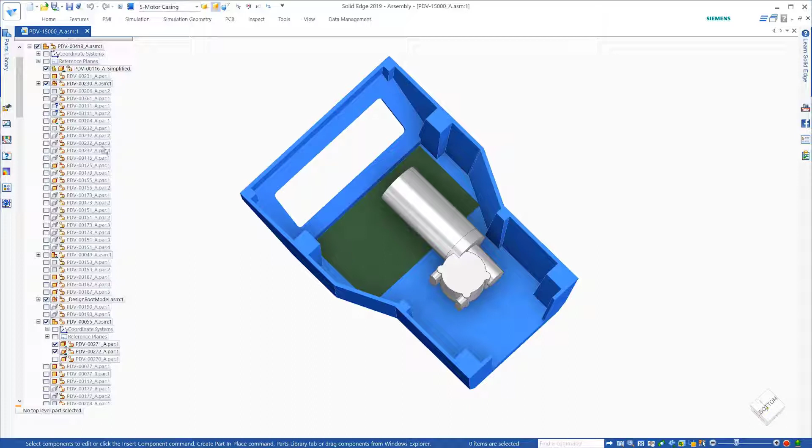Starting with structural simulation, in addition to static studies for stress, strain, buckling, vibration, and steady-state heat transfer, users now have the ability to study the impacts of heat moving through parts with relation to time, also known as transient heat transfer. This allows designers to see temperature changes over time in order to assess things like heating and cooling performance.

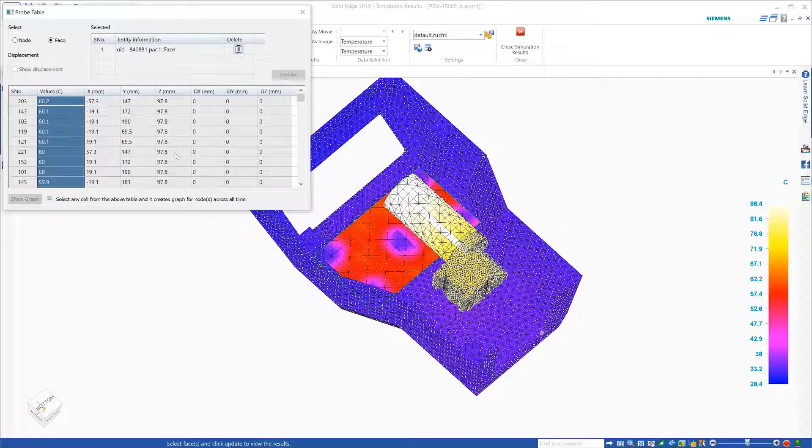In this example, we need to ensure that the heat generated from the motor doesn't overheat the printed circuit board, or PCB, located directly beneath it. A steady-state heat transfer has already been defined here, which takes into account the heat being generated by the PCB and the motor. Using the probe tool, we can query the temperature at different points on the board. Here, the new face probe option allows us to easily find the hottest regions.

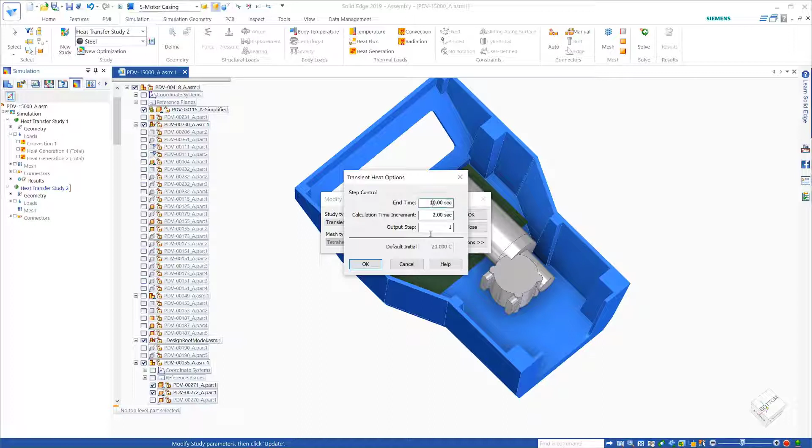What we're seeing here is the final steady-state result of heating parts until they have reached full capacity. However, for this assembly, the motor only works for a couple of minutes at a time. As such, to get a more realistic view of the heat on the PCB, we'll use transient heat transfer to accommodate for these working times. This is as easy as copying and pasting the existing study, changing the study type, and defining the working intervals. Then the study can be solved.

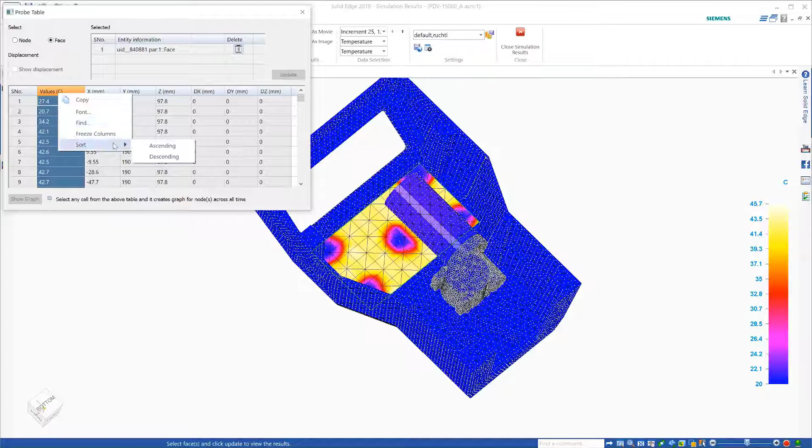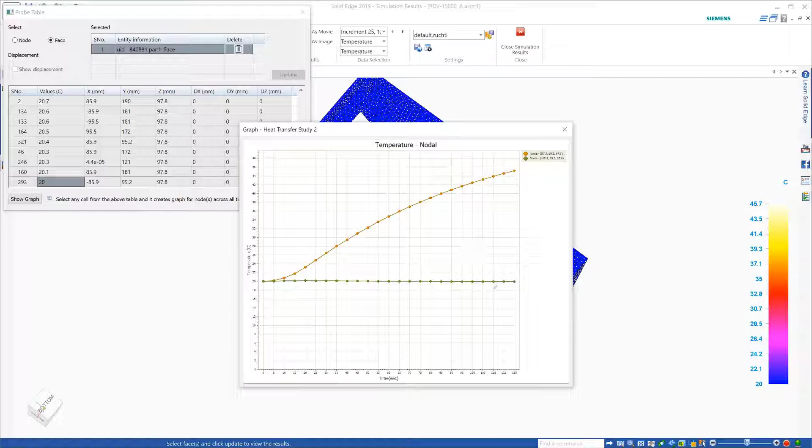Viewing the results, we can immediately see the difference in heat distribution of the assembly. As it's only working for 2 minutes, the motor doesn't have time to heat to full capacity, effectively having a negligible effect on the overall temperature of the PCB. The probe tool shows that the maximum temperature is 15 degrees cooler than the previous study. Additionally, selecting any nodes we'd like, Solid Edge provides a graph to easily visualize changes in temperature over time.

Solid Edge's transient heat transfer capability gives more precision to the user, allowing for essential visibility into heat distribution of components critical to validating your designs.

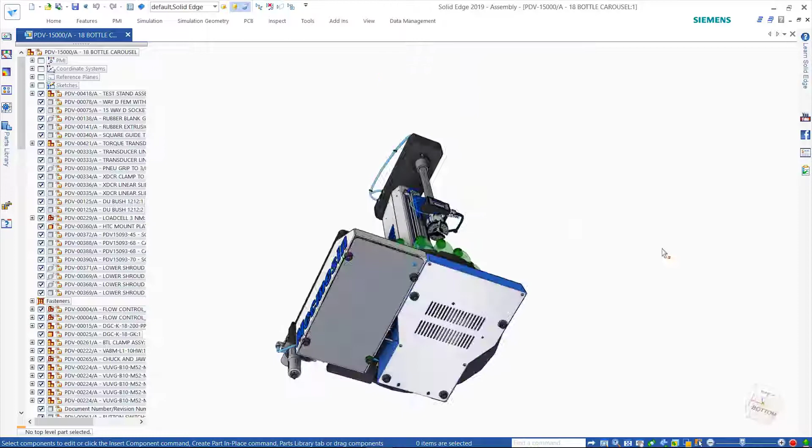Turning our attention to flow simulation with FloEFD, the EDA bridge allows the import of PCB designs for fast analysis. Again, focusing on the PCB, the electronics design for this has been completed in the Solid Edge PCB application. The PCB ODB++ information can be opened via the EDA bridge directly within the Solid Edge assembly environment, where several formats are supported. This automatically generates the board along with the components and copper traces.

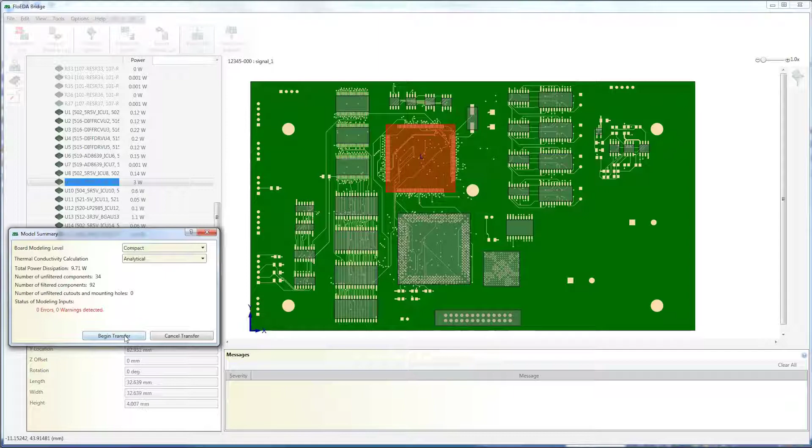The thermal properties can quickly be imported in order to apply the thermal data to each individual component. The printed circuit board is transferred to FloEFD, where the simplified assembly is generated. All material properties, heat sources, and radiative definitions are automatically generated in the FloEFD project.

Loading the simulation results clearly shows the temperature distributions on the board and components. Focusing on the complete design, we can see the effects on the airflow in that part of the assembly.

Other new enhancements include the ability to analyze the behavior of fluids moving, sloshing, or pouring using free surface technology, as can be seen here when this trailer comes to an abrupt stop. Compare this behavior to a design that contains baffling in the tank to try and eliminate the excessive sloshing. Viewing the results of the two designs side by side illustrates the benefits of the baffled design.